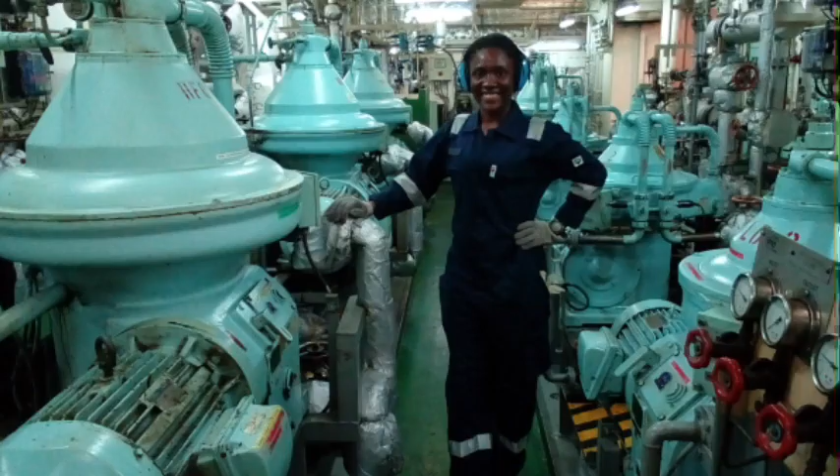So, as promised, this week we'll continue our topic on piston cooling. Last week I talked about piston cooling. Why do we need to do piston cooling? If we don't have piston cooling, what is supposed to happen? What are the disadvantages and advantages of piston cooling, if you would say?

Today I will still continue on piston cooling, but we'll be considering how this cooling process is achieved on medium speed or high speed engines, the smaller engines, and on larger two-stroke slow speed engines. How do we achieve piston cooling on the four-stroke engines, which are mostly the medium speed and high speed engines, and on the two-stroke engines, which are mostly the large crosshead slow speed engines. So we'll be considering the smaller engines first.

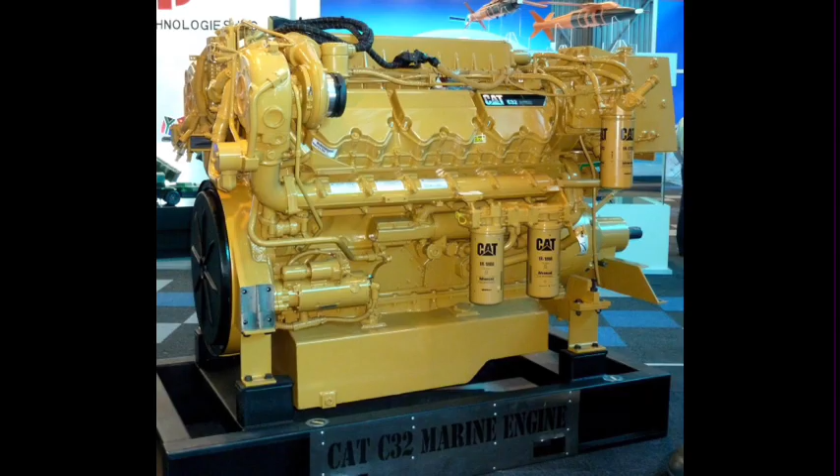While we're considering piston cooling in small and large engines, the main factor to be considered is their design and the material used for the piston.

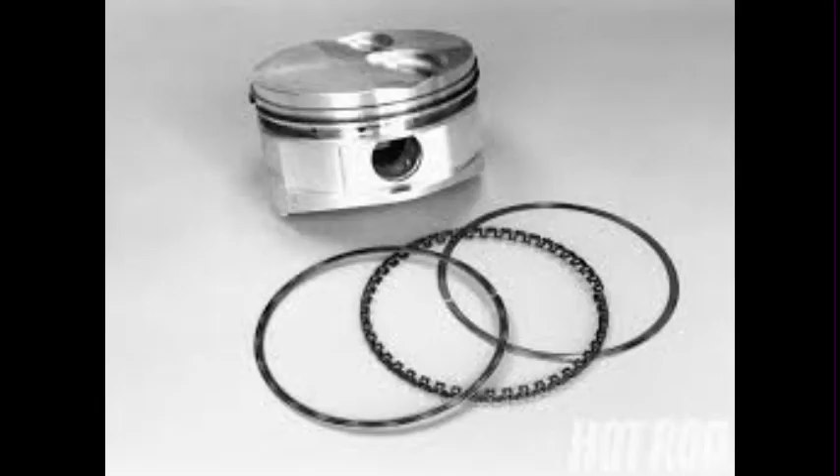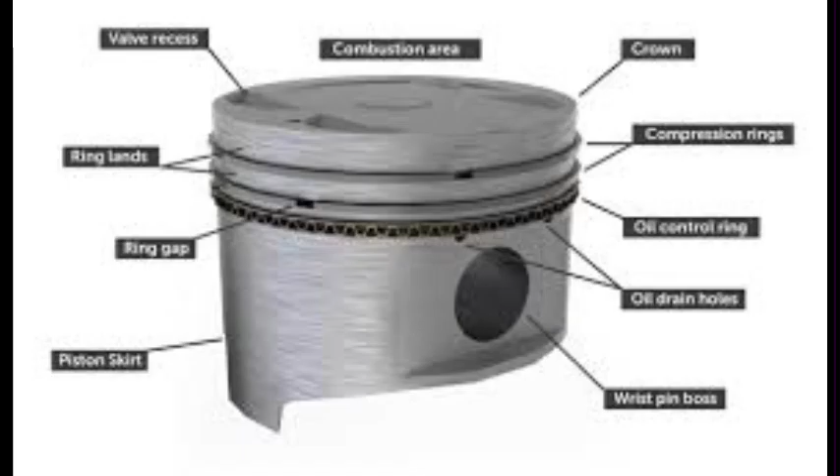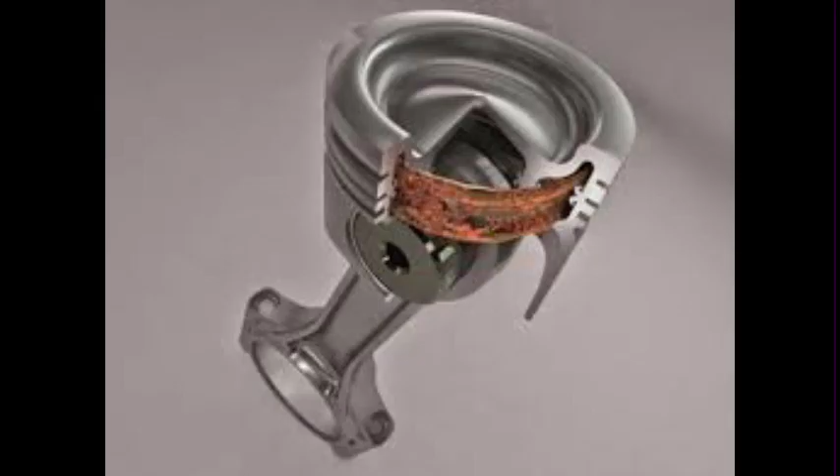Now imagine a small engine and a big engine. If you need to lift up a very heavy block right now, you need more power. To achieve that power, you either use a lifting machine, or as a human being, you bring somebody with lots of strength. That person has to eat a lot of food to complement the strength needed to lift that equipment. Now if I want to lift a very small equipment like a cup or a book from a table, or just push a small block, I wouldn't need much strength. So even without eating much, I can actually move that thing.

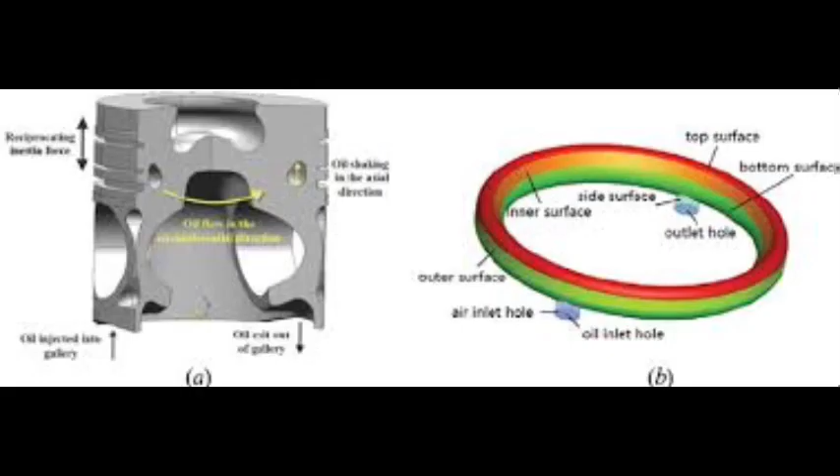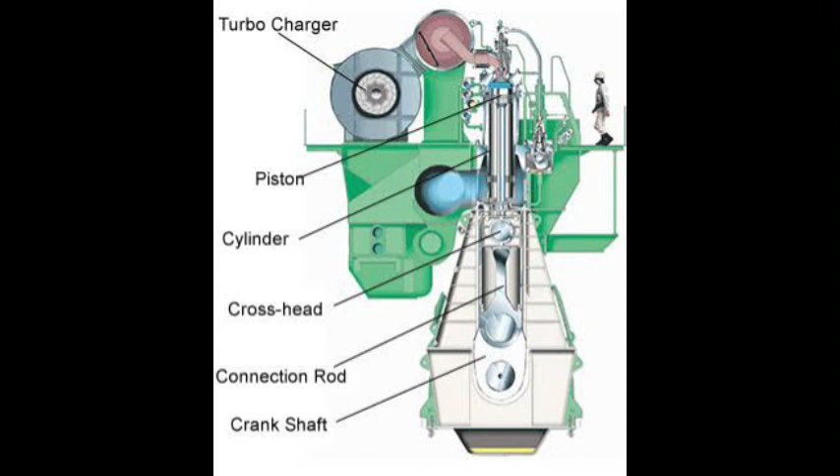So now let's use this illustration to compare with piston material in relation to piston cooling. When you have a small engine, the heat dissipated at the end of every combustion is very small, not as compared to heat dissipated at the end of combustion in a large engine. So it means more fuel is being burnt for the bigger engines, and when more fuel is burnt, more heat is released and more cooling is needed. For the smaller engine, it's reduced fuel, reduced heat, and the cooling is not as hectic as with the large two-stroke engines.

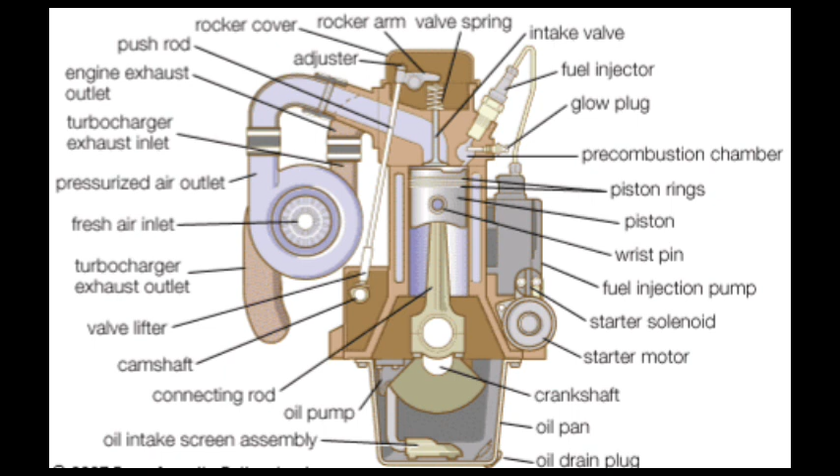Now, for the piston design of the smaller engines, it must have thicker materials for the piston crowns and piston walls. This is to aid thermal conductivity, because conduction is the main method of removing heat from the piston of smaller engines. Although there is radiation, it's very small, sometimes negligible. The main cooling is achieved by conduction.

Now let's talk a little on this. How is this piston for the smaller engine cooled by radiation? It occurs this way: normally in an engine we have cooling around your cylinder liner, mostly cooled by fresh water. As the cylinder liner is being cooled, the temperature is reduced, so slightly the heat can be radiated to the nearby cylinder liners that are being cooled by the water circulation. But this effect is actually very small, because the heat flow from the walls, from the piston crown, is right there.

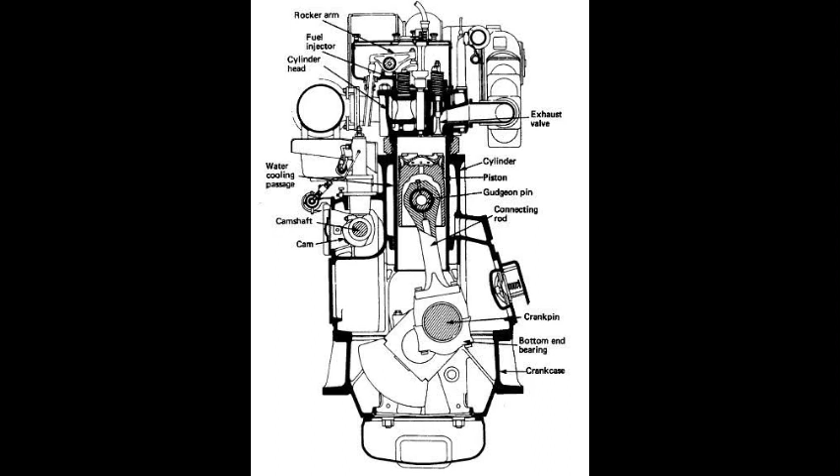But the main method of cooling in the four-stroke engine, the smaller engines, is by oil splashing. Now, for four-stroke engines, there is no stuffing box that divides the combustion chamber. It's an open space between the crankcase and the combustion chamber. So as the crankshaft rotates during operation of the engine, oil is being splashed into the underside of the piston. As this oil splashes, oil has functions of lubrication, cleaning, and cooling. So you see, the oil splashed onto the underside of the piston now removes a very large amount of heat by conduction. That is the main method of cooling for smaller engines.

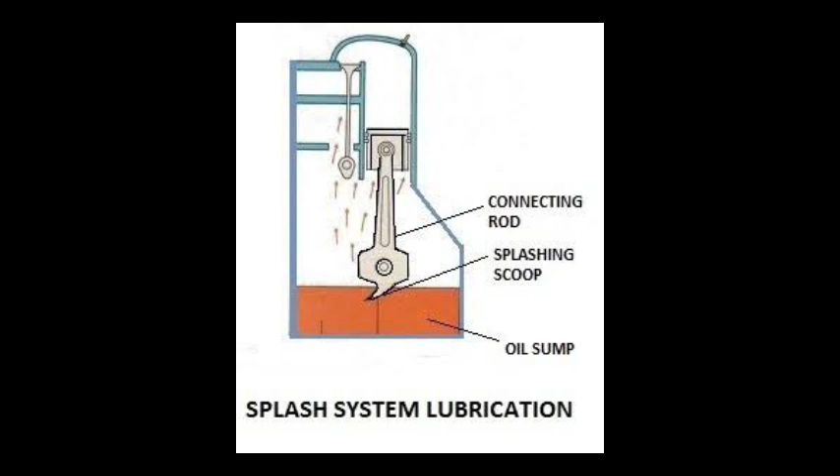So let's move on to the larger engines. For the larger engines, the cooling is more necessary because more fuel is being burnt, more power generated, and definitely more heat is generated. We have to maintain the piston within a temperature that it does not rise to a point where the strength of the piston is actually reduced, which can lead to failure of the material.

Construction of the piston is brought into play here, because for large engines, it has cooling space. It has spaces where coolant passes through, either water or oil, whichever choice of coolant is being used for the engine.

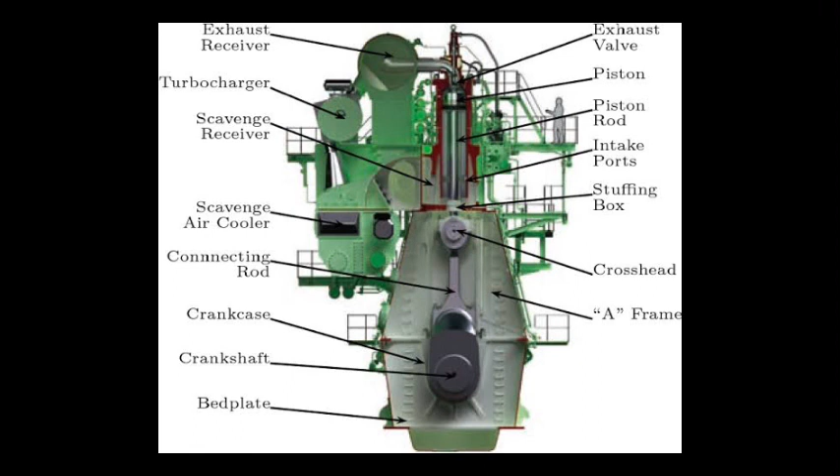Remember, for the smaller engine, it needed thicker walls for conduction, thermal conductivity. Now that we have spaces in which the coolant passes through to cool the engine, if the walls of the piston are thick, the exchange in heat may not really be very effective. So in this case, those kinds of engines have thinner walls. The walls are thinner, the piston crown is very thin also.

But instead, an internal rib is actually used to support the piston crown, more like a wedge to support it because of the thin design of the piston crown. For this particular large engine, for cooling to be effective, the piston design has to have thinner walls and thinner piston crown to achieve that cooling.

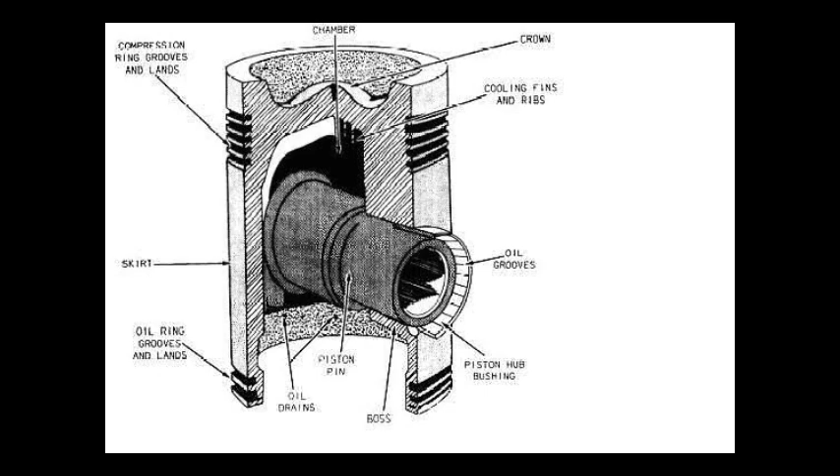So now we have cooling passages. These passages have cooling means, either oil or water, and they are connected to either the water tank for piston cooling, or the oil tank for piston cooling, through telescopic pipes. That's telescopic pipes, pipes that are movable.

Pistons move up and down the combustion space, top dead center to bottom dead center. If we use a fixed pipe, it will not get it. So telescopic pipes are used, pipes that are movable to some extent, not like it has no support, but pipes that are moving to some extent to achieve this.

So you see that the fluid now goes in through the underside of the piston, the lower side of the piston. Why does this fluid have to go through the lower side of the piston? Because the piston crown is the hottest part of the piston, while the lower side of the piston has a very low temperature.

Now, when the means of cooling, that's either oil or water, passes through the underside of the piston, it will absorb the heat from the lower side of the piston. It absorbs the heat, it cools the lower side. The temperature of the lower side is within limit. It cools it and keeps going up.

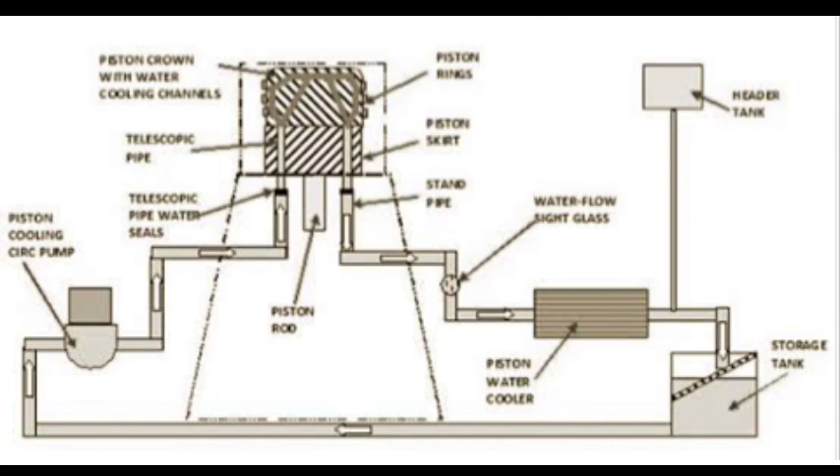As it's going, it absorbs the heat gradually. The fluid, the coolant itself becomes a bit hot, not very hot, just a rise, a warm increase in temperature. So as it reaches the hottest part, which is the piston crown, the two temperatures can relate itself without causing damages to the engine.

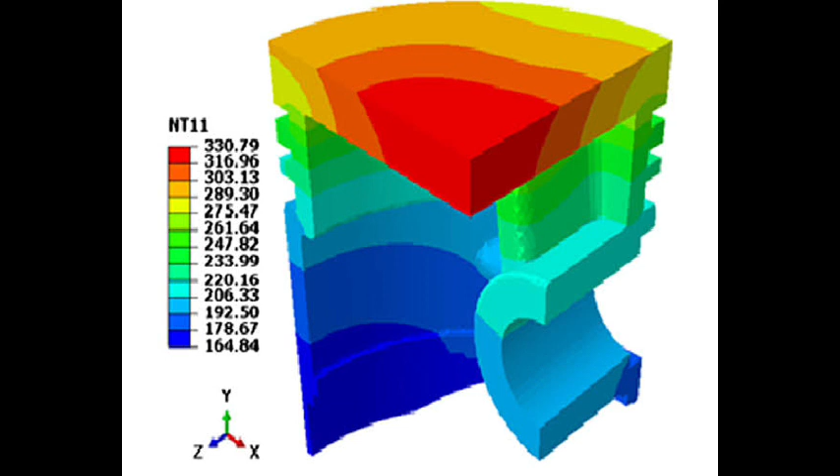For effective cooling to happen in the piston, the heat transmission and the heat absorption is governed by the difference in temperature across the piston section. Now when the difference in temperatures becomes excessively much, it can cause a problem to the piston, like shock, and that can lead to crack, as I explained.

Now, this is the same reason why the coolant has to exit in close proximity to the crown, in close limits to the crown. Some people may ask why the coolant has to exit there, leaving the cooling space in close proximity to the crown.

Some people may ask, why does the coolant have to enter the piston from the lower part? It's the same reason. Simply, the top part of the piston has the hottest temperature after combustion. Now, the temperature gradient, as we discussed earlier on, increases as the crown thickness increases. When the coolant comes from the lower part of the piston, which is the less hot part, it picks up the warmth.

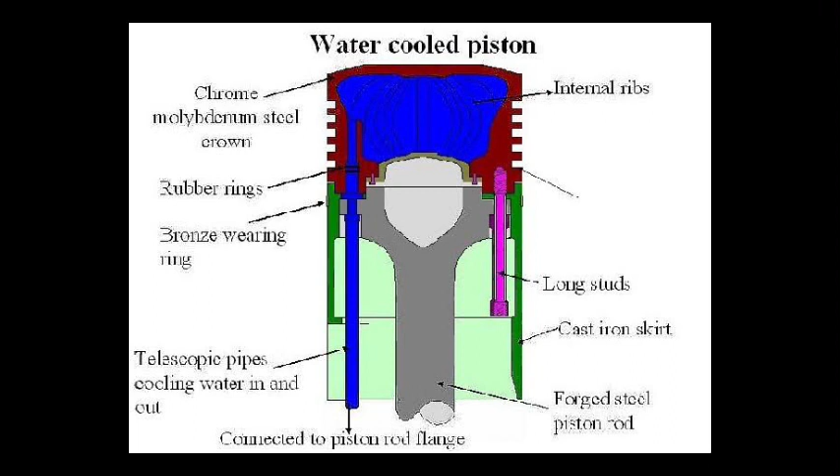As it keeps going up, it cools those parts, absorbing their heat. On reaching the piston crown area, the coolant has some heat, some warmth. It has gained some heat, and the temperature difference, or temperature gradient, is not too much, so it can cool it safely without causing shock that can lead to crack and other problems in the engine, and thereby have effective thermal efficiency.

Another reason why it is so is to prevent air or vapor lock in the cooling space. Any space that is void has a tendency of having air in it. So when the coolant starts from the underside, it ensures that the cooling space is always filled up, to prevent air lock underneath the piston, which will eventually reduce the heat transfer.

So that is what we have for this week.